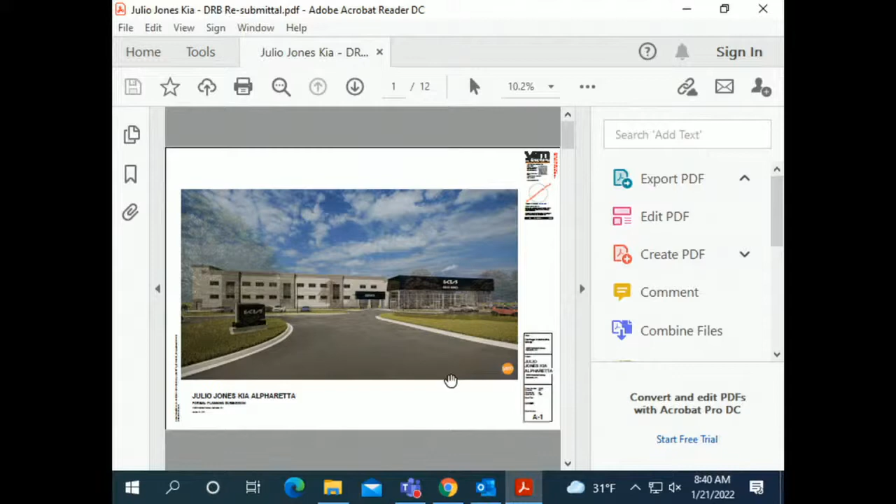So Kia came to them and said since they had not started construction yet, they needed to come with the new Kia branding. So essentially, other than this black service part right here, this end didn't change. This did, and then the signage.

I had seen this logo around for a little while. I'm like, what is that? I couldn't figure out what vehicle it was, and then one day I knew the name of the vehicle. I'm like, wait, that's a Kia. Oh, now I see the I and the A. Okay, so that's their new thing.

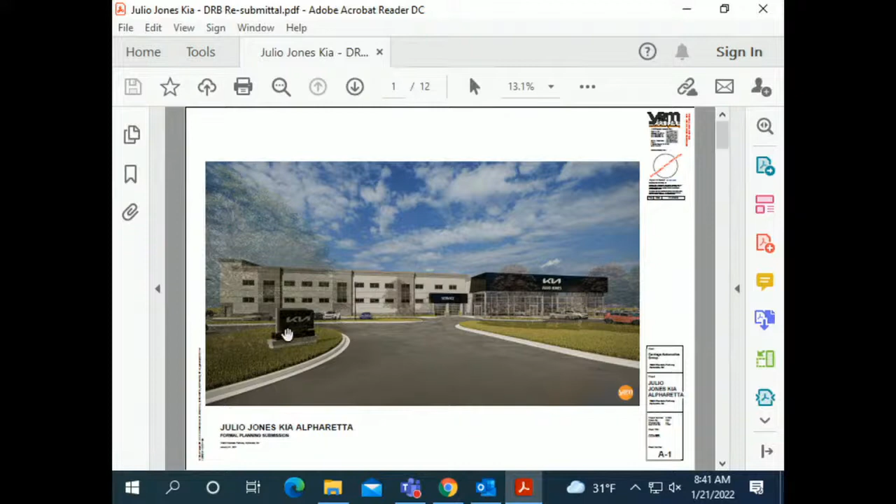I'm gonna guess that Julio Jones will probably get his name down here in black somewhere. To me, I think it looks nicer, more dealership than what the other one did, and I think it's fine. The other one was a little bit plainer. Yeah, this has more of an upscale look to it, I think.

Yes, so I think it's very appropriate. Question, I know they came back a couple of times with changes. Maybe I was looking at March. Have they been back since March? Because the right side in March had a brick base, and now it's lowered and it's stone across the bottom.

We saw them in February too, February and March. I was comparing to the March package, and it looks like the left side is different. I can pull that up. I missed that, so. Unless they came back- They did not.

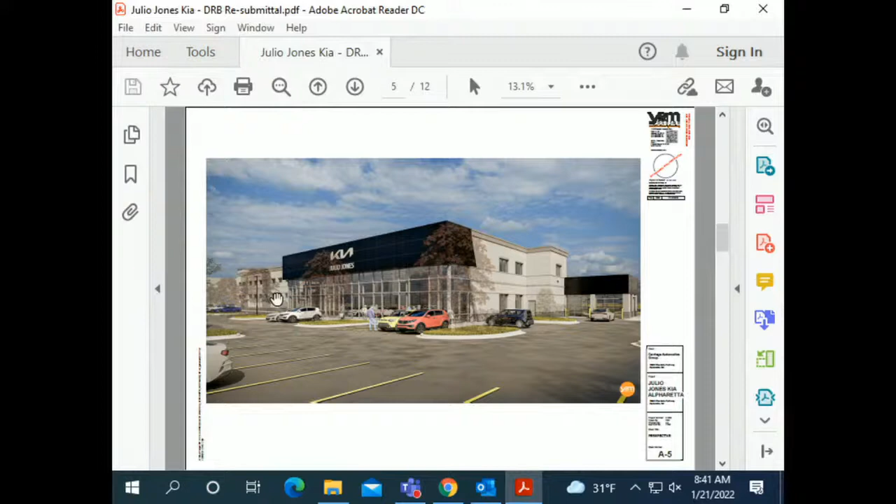March was the last time, right? And they came back and put some stuff in. If you look at March, I think they changed the left side of the building. Personally, I think it's for the better. There was February and March, two visits, and then a year or two before that we saw the original one come through, because remember it had a car wash in the back that they separated out, and it was over some of the setback area back there. Was it like a water table or something, or just stripes of brick?

Frank, do you remember? Was it like a water table of brick? It was actually high, probably 4 or 5 feet of brick across the bottom, and the top was sort of brick. Now they've eliminated that lower brick and put in a lower water table that looks like stone. I remember it being higher. I think it looks better the way it is now. I like it personally, because I think it makes those vertical elements stand out more. Well, the black adds a lot. The black is nice. That's their showroom.

Good morning. Good morning, Richard. You're over here now. We all got moved around, shuffled. Welcome to the west side. I'll have to rewire my brain. Yes, trying to keep you on your toes.

Okay, I'm not sure why it's not opening right now, but I'll let it keep working. It is a pretty big file. And just for the board's knowledge, we are even further limited than last month on our technology, so we get what we get.

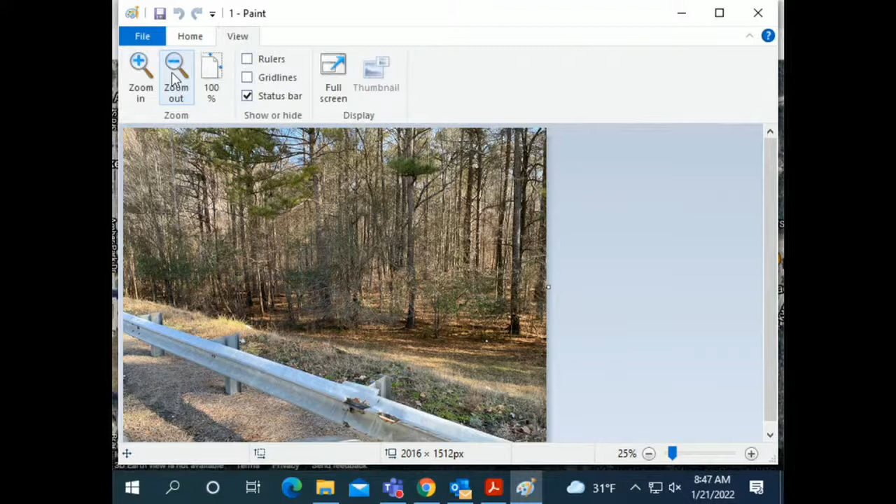So just want to make sure I didn't miss it, the city council minutes that were included on this one says, in the original August 2020 staff report, it states the following conditions, but it's not clear whether those conditions were actually adopted by council. Were those conditions adopted? What's the date? Well, it has the date of the staff report as August 10th, 2020, and then it mentions a prior meeting, but what's not clear is I'm trying to figure out what the council conditions are.

I think we'd have to go back to the prior meeting minutes, because this is the meeting minutes where it was reconsidered after going to Superior Court, of course. So those are the conditions. Because one of the conditions says it's supposed to look like an office building, and it looks nothing like an office building, so.

Just seems like a non-starter. Let me look at that. I'm sure that I have the right minutes, but we'll look at that.

Yeah, because I think these are the minutes when it came back after going to court. So it seems like the initial set of minutes probably said we had this set of conditions, and then they challenged something, I don't know what they challenged. But they must have made the presentation in 2019, and then it went to court or something, got denied, went to court, and then they came back. It must have been the November council meeting, because they approved the council minutes of October 25th, 2021, so.

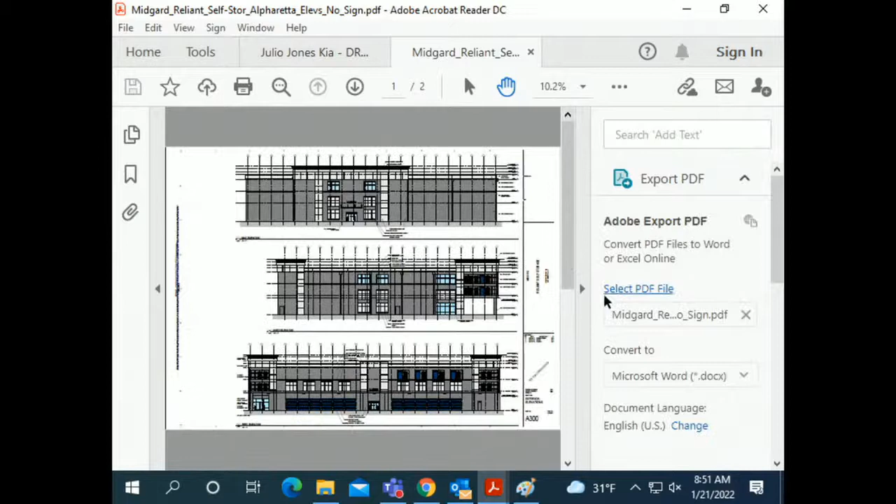I have some photos. And there's a lot of just blank brick walls on this thing. Well, and also one of the conditions says the maximum building height shall be 3 stories or 36 feet 4 inches, and it's taller than that, so I'm confused.

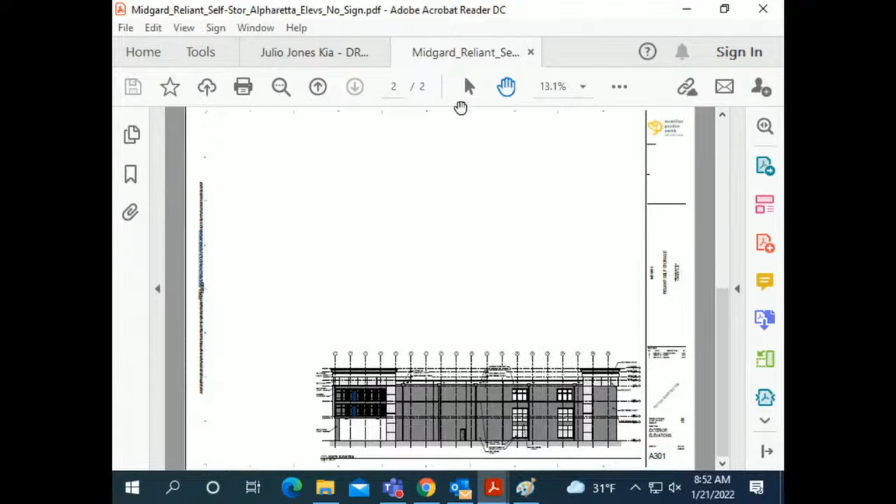That's another good point. It's 47 feet tall, but the way we read it is the flat roof, not the cornice. The physical roof - it says the roof is 36 feet. Parapets aren't included in height. So does it go to the top of the roof or the bottom of the roof? It would be the top of the roof structure, and then the parapet would be above that.

This is a flat roof, I guess. It is, it seems to be.

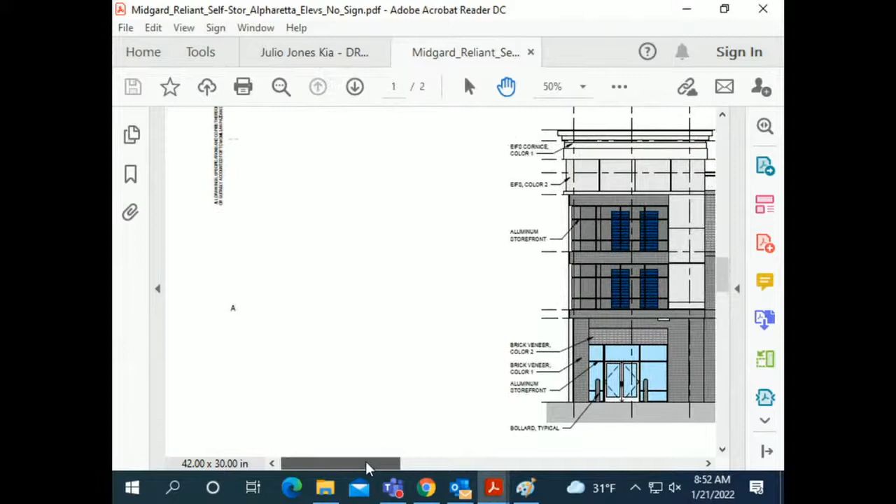Okay, anything else on Midgard Storage?

Here's the roof line right here, 36 feet. So that's what you consider the 36 foot 4 inches maximum height? Okay.

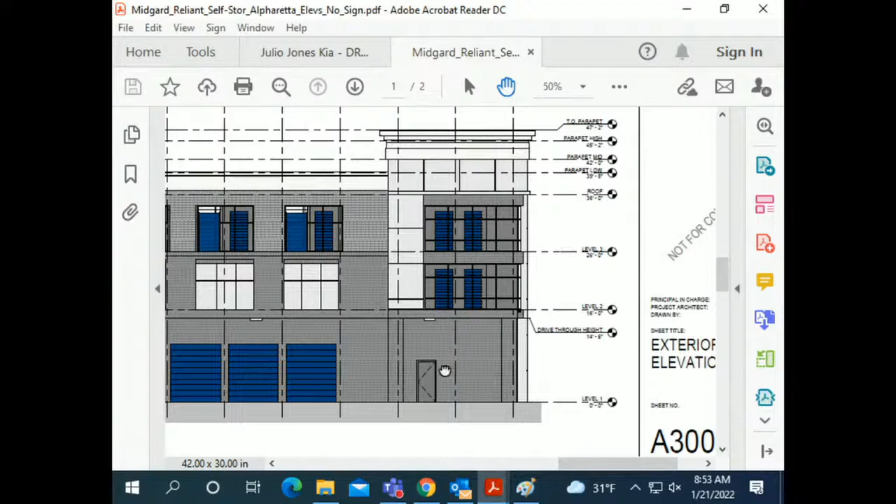Yeah, and they're the faux doors, or whatever they call them. Let me try to zoom out. And you actually drive behind that - you drive through the building behind those.

It's kind of a lengthy porte-cochere, right here. And wasn't there a condition that said no loading or unloading facing Milton or 400? 400, yep. And that faces 400, right? And it says loading. Okay.

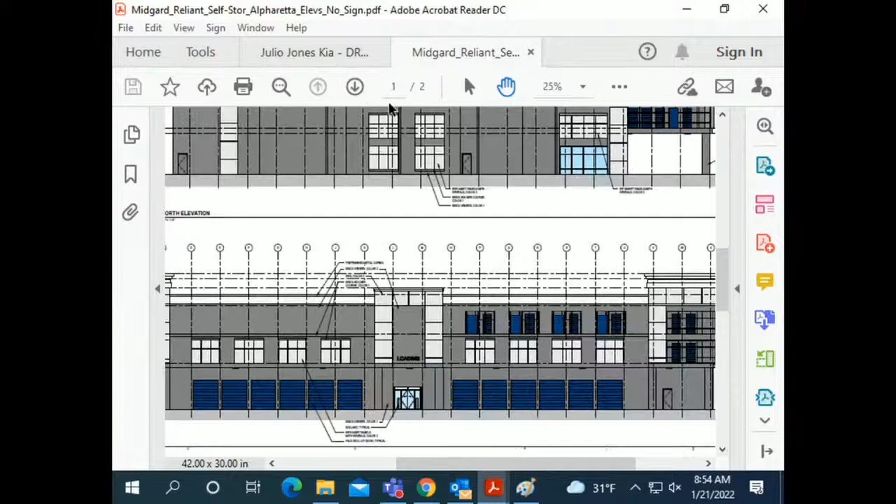So now I'm gonna guess - it's gonna have to go around to the other side. Shall not be visible. Loading, unloading areas shall not be visible, so that's their screening for those areas. Kind of, I guess - you could screen them with enough landscaping. And so it's not and visible, shall be heavily screened with landscaping and decorative walls or berms.

Okay, so they can't be visible and they need to be heavily screened - a little bit of both. Has to be both, okay. Yeah, that could be a problem for them, but still - we'll see, okay, all right. But they could always build a decorative wall if you want to screen it.

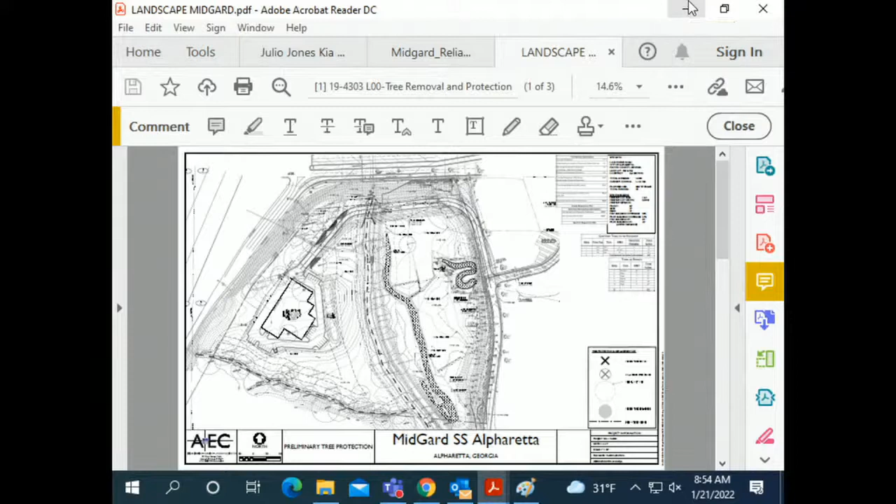And it sits down from the exit ramp, looks like about 25, 30 feet. Okay, so we need site - all right, any other comments on the Midgard Storage? All right, then let's look at the cooler a minute, Brett, if you can.

You last looked at that in December, and I wasn't here. I was part of the last several reviews of this, but not in December. Does that mean I can participate or can't participate? Because we just deferred it. I think you can, since you were on the original and there was no action taken on any subsequent cases. Mike, since you're here, would that be? Can you repeat that just a little bit louder?

So he was here at the initial time. This last case has been here, I think this is the fourth time. Mr. Swing was here on the first one, which was the original look at it. Then we had some subsequent ones, two after that, where no action was taken - they just weren't really prepared, so it didn't go to a vote, it was deferred. And now we're on the next one. So I think since he was at the initial, and then there was no action taken on the next two...

Yeah, I was actually at all of them except the one in December - the very last one, the last one in December I missed, and we just deferred it. Is the concern some sort of a conflict of interest, or? No, just that he wasn't at the very last time. I don't think that makes a difference.

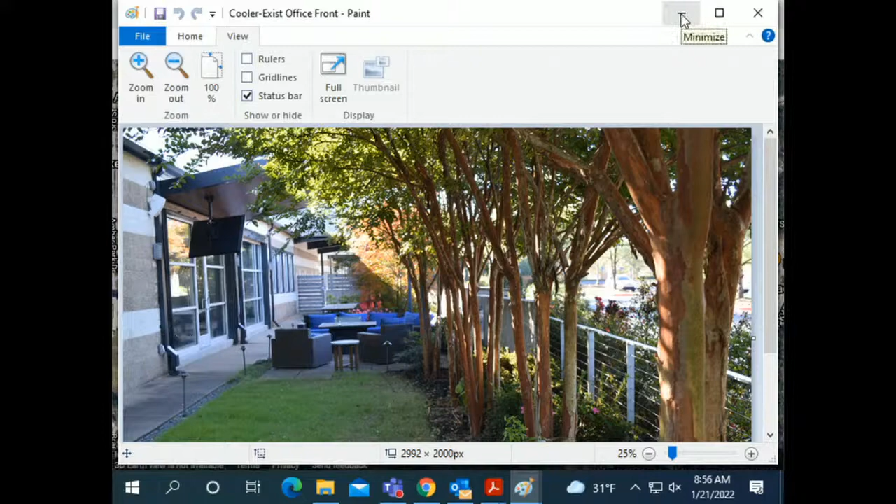Here's just another quick look at that. So you got the dark metal - these are the two different colors of banding that's around the other side of the building as well.

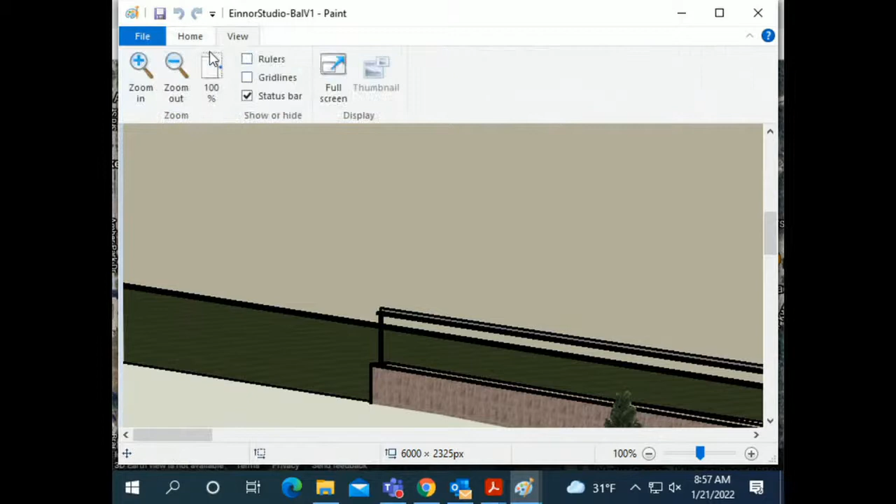Our issue was always how well the whole thing blends with the existing building. Yeah, and I think they've done a better job now. I went out there and met with them. I told them I thought part of the big problem was that angled roof.

So we were really struggling with the angled roof. We fixed that by keeping the angled roof there, but hiding it behind a new parapet that's meant to resemble what the rest of the building has. And the materials are the same.

They're leaving the bottom open. They don't really know how that's gonna work out just yet. They are doing the fencing there. They're just gonna paint it black to make it go away.

So this looks a lot more, I think. What's on your screen looks better than this. This looks like a growth, but this looks more even. This is like double the size, so I'm curious. That looks like you put a Lego on top, like it doesn't blend as much.

I'll tell you what happened: I think they did a portrait view of that instead of a landscape view, so it's squeezed. It's pushed. This is totally different, it looks more proportional, correct.

That's true. So when we were out there, I measured this - can you see the pointer? I measured this parapet and it's a little bit over 4 feet. This one, they need just under 3 feet to cover from end to end, the flat roof.

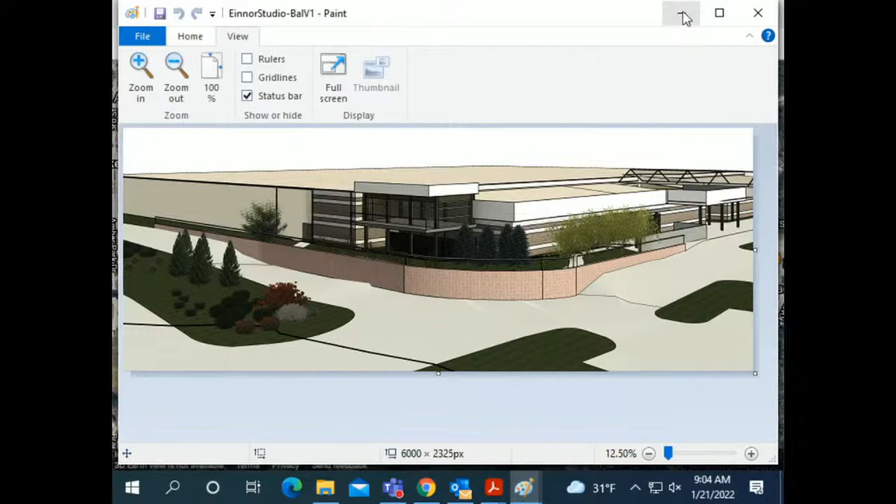Repeat after me: I, Pat Corkill, hereby accept the honor of serving as a member of the Design Review Board of the city of Alpharetta, Georgia, and in so doing, I do solemnly swear or affirm that I shall faithfully perform the duties of board member, that I will regularly attend meetings and uphold the ideals of community and service, that I will act and conduct business in accordance with the city's code of ethics and conduct, and that I shall support the charter and laws of the city of Alpharetta, the Constitution and laws of the state of Georgia, and the Constitution and laws of the United States of America.

Yep, you are so sworn. Congratulations. Awesome. This isn't getting on some strange mailing list, is it? If I get a bunch of junk mail because of this, I swear. Oh, Pat, not Patrick, look at that. All right, congrats. Thank you, Mike, thank you.

I didn't even be looking at Brett for the whole thing. This way, I think it works. Thank you for coming, appreciate it. We are the technology city of the South. We will fix it at some point. Someday.